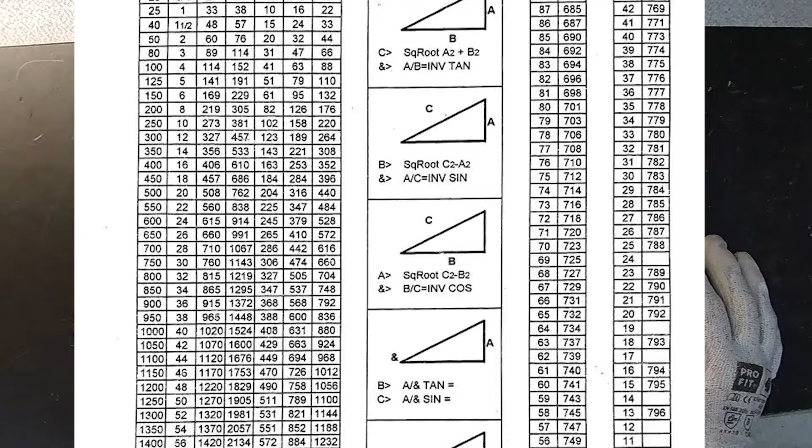Okay, let's get started. Before we start, we have to know some information. If you have measured or gotten some information about the pipe we're working with, there's a DN list that will appear now on screen. You can see the DN list, with all sizes in inches and DN. You can see the radius, and also the real pipe dimension in millimeters.

So I have decided on a DN80. I'm going to write it down, DN80. It's got a pipe dimension of 89 millimeters, it's a 3-inch pipe, and it's got a radius of 114 millimeters. Okay, that's all the information we have.

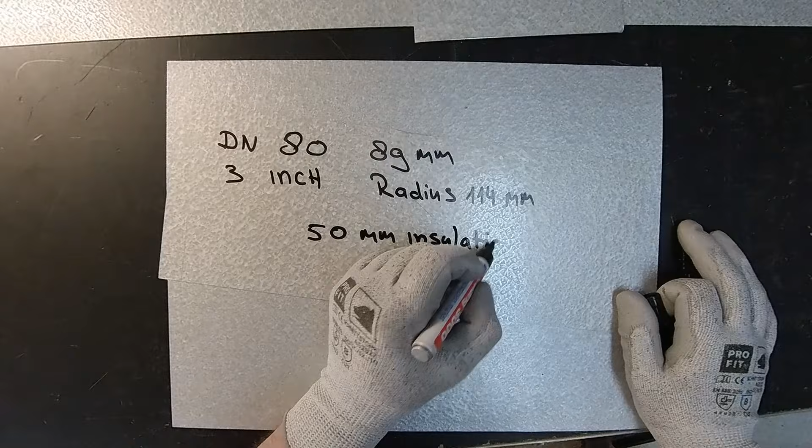The pipe I'm going to insulate has, well, something random - I'm just going to take 50 millimeter insulation. That means I'm going to round off some sizes. So if I have an 89 millimeter pipe, I'm going to round it off to 90 millimeter.

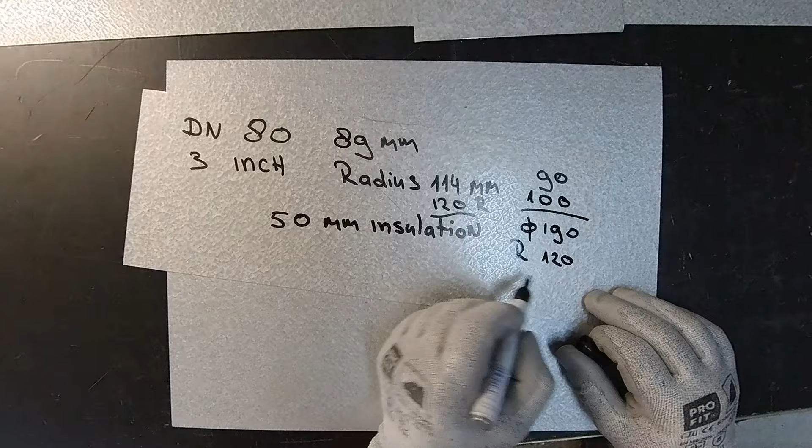And if my radius is 114, I'm going to round it off - my radius is going to be 120 radius. The pipe insulation is 50 millimeter, so that means plus 100. We have a diameter of 190 with a radius of 120, and it's going to be a 3-part bend. So that is the information I have.

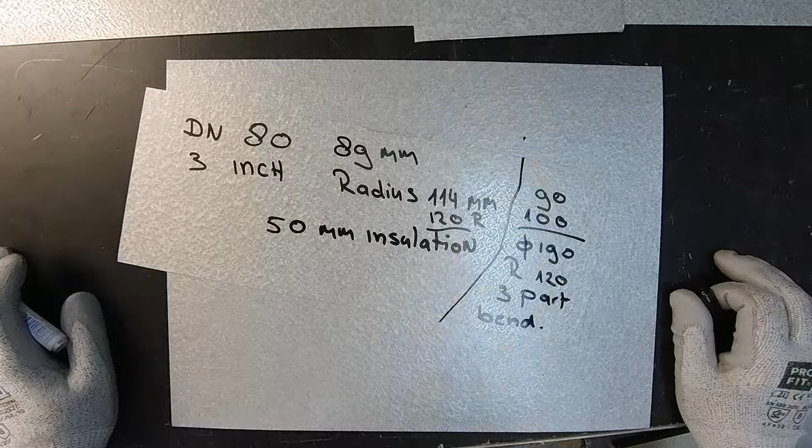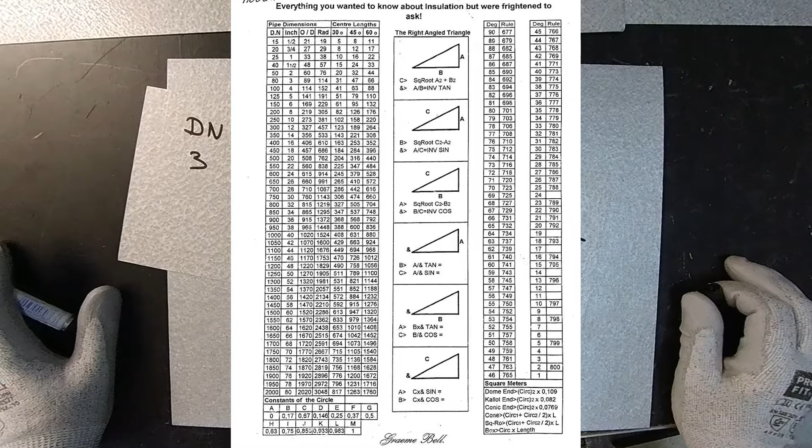I'm just going to show the list again on screen - you can make a screenshot of that list. If you don't have any idea how to get those radius or dimensions, it's a standard list. Of course there are also other pipes with other radius, but that's something you have to figure out yourself. Once you have learned how to make a segment bend, it's also easier to take sizes and find out the radius you need.

Okay, now let's get started. First what we do is make here a working line.

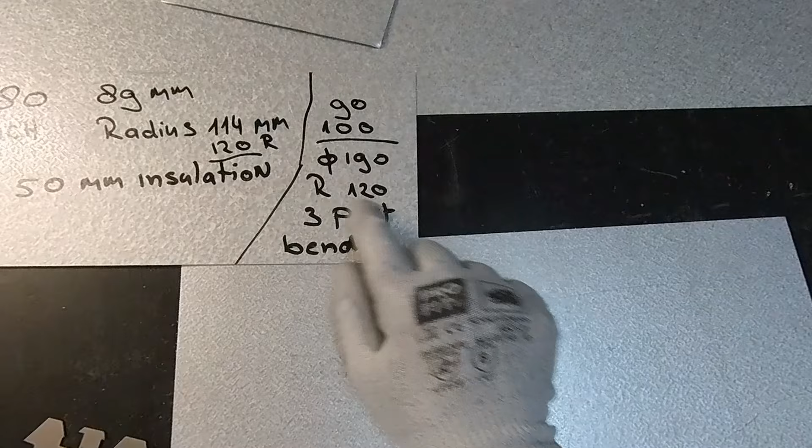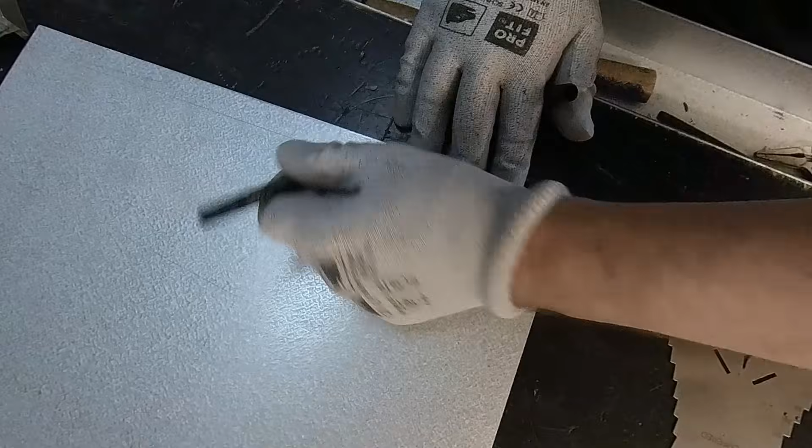So we said we have here 190 diameter, we have a radius of 120. That means we go from the side, from the 0 point here, 120 millimeter. And diameter 190, that means 95 is half.

So now we're going to make here a half circle. Let me check it here. So we have here exactly 190 diameter.

Now we're going to pull up here in the middle line. We're going to divide this part in two. And now you're going to divide this part in 3 equal parts, or in six equal parts.

1, 2, 3, 5, 6 - so we have here 1, 2, 3, 4, 5, 6 parts divided with a bow divider.

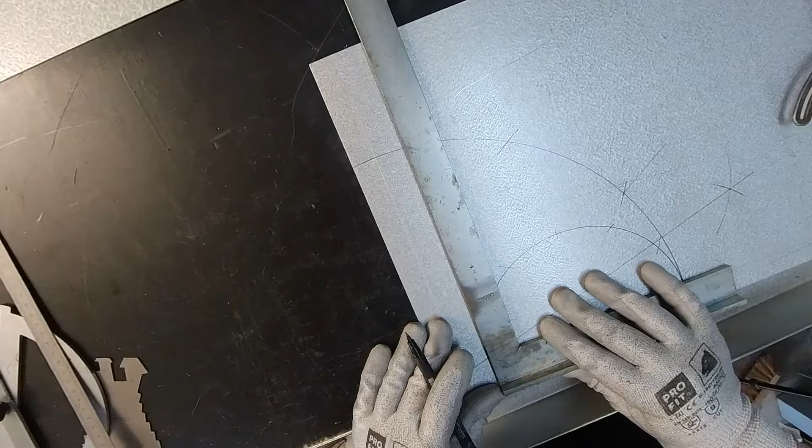So now we have the exact angle we need for our model, the template we make, yeah. So next thing what we're going to do is we're gonna pull up those lines. So this one, going to pull up, and the next one.

So these are now my points. So I'm gonna number it. Number 1, number 2, number 3, number 4, 5, 6, and number 7. So these are my points here.

Now, what we also are going to give here, this distance is here 20 millimeter, and I'm going to give swage allowance 5 millimeter. That means I give here 15.

And now I have here down on the line, so these are exactly my points, including the swage allowance. The swage allowance doesn't affect the angle. So if you forget the swage allowance to give, or you give a little bit less or more, it won't affect the angle, it will just affect the radius. So the radius is getting a little bit smaller or a little bit bigger. That's everything. This is now done for now.

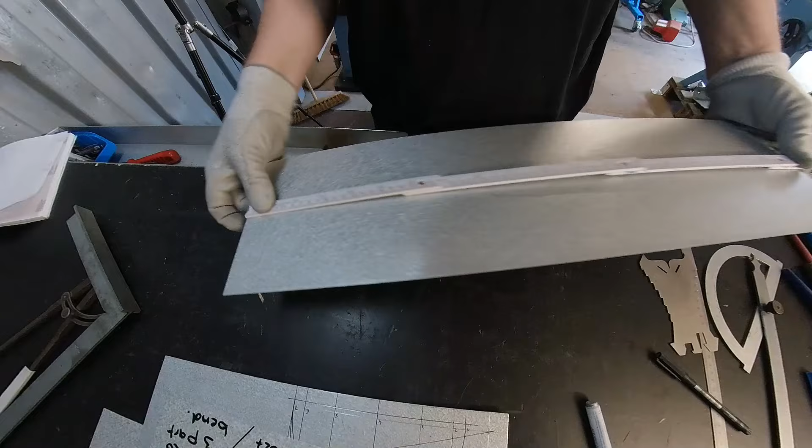So I'm going to check this here out. See, and put it here exactly on the metal where it is, and here you see we have here, wait. So we put here this exactly on the size, and here we come to 627 millimeter. See?

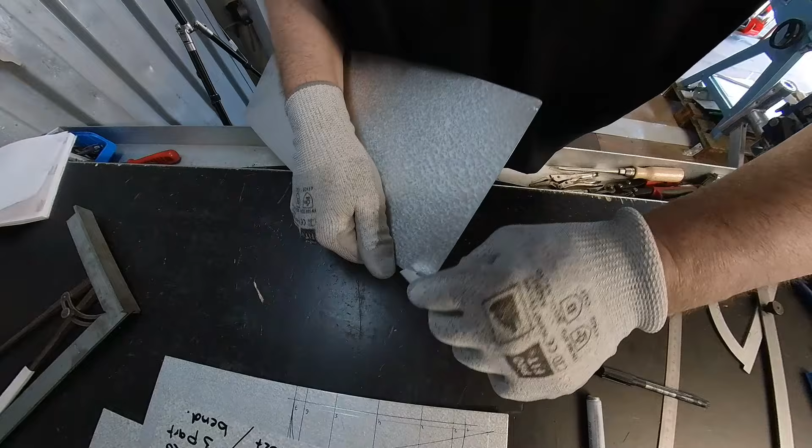Okay. Now what we do is we go left and right, 15 millimeter. And here also 15. And well, I have here, you see, so the outside, the biggest size from the outside is, well, it's almost 65. That means I need a maximum wide metal of 130, 140. So this is bigger. I have here 180.

Yeah, so you can always check here the biggest size, how big your metal should be. So 180 I have. So I'm gonna put in here the middle line. That's the middle line. Now, of course, I can make here this line a little bit more visible.

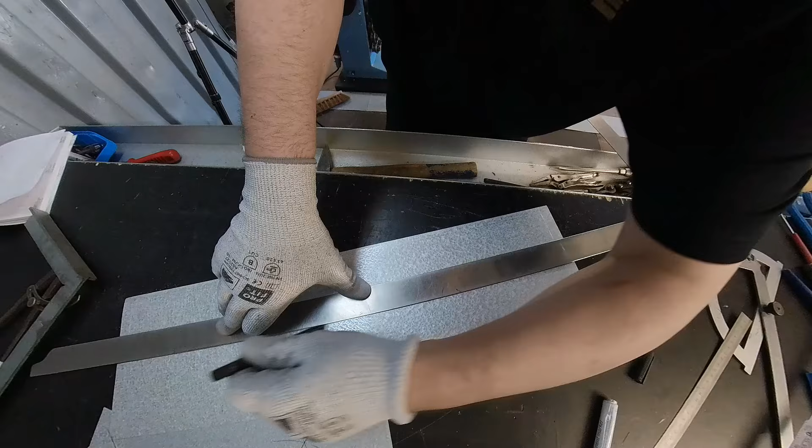And we're going to divide it in 12 equal parts. So I'm going to make this also a little bit more visible. Yeah, that's the thing. If you work with real sheet metal, it's always a little bit hard to make everything look visible because of the light and everything.

So now, as always, we're going to use this method to divide. So I'm just gonna hold my measure tool here, 650 I have here in diagonal, and a half of 650 is 325.

Wait a minute. But you can also put normal diagonals. Put just a diagonal, also a method here. If this smaller, see?

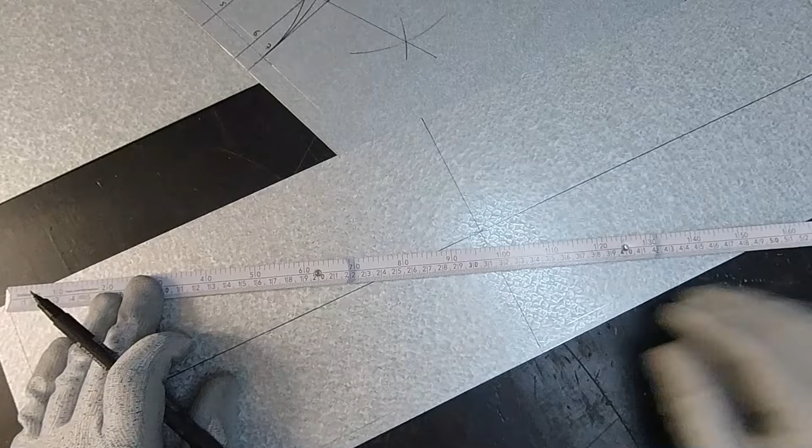Okay, now next thing is we're going to divide these parts exactly in 12 equal parts. So putting this here on the line, see here, the nil on the line, and I'm going to find something I can divide exactly in 6. So 6, 30 maybe, no 30, yeah, okay, 30, yeah, 300 millimeter. Exactly in 6 parts. So we have here.

5, 10, 15, 20, 25, and we do the same thing on the other side. And there's always a number you can divide in equal parts. 5, 10. So once we did that, again follow those lines.

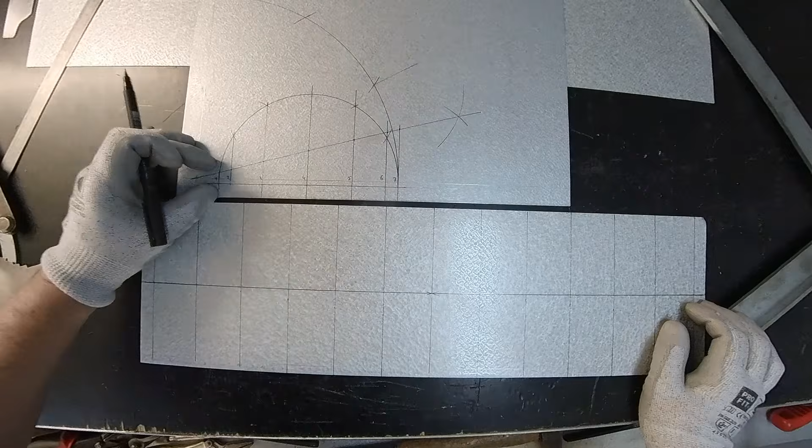Now once we have everything ready, the next thing is we're going to number it. So this is the bag, this is the biggest size, and that's the smaller size. When you look here at the bend, we have the bigger size and the smaller size, and exactly in the middle where the seam is, that is number 4.

So we start with the seam, number 4, and then we go backwards, number 3, 2, 1, and then number 2, 3, and you see number 4 is in the middle, and then we go number 5, number 6, number 7, that's the biggest one, and then we go back number 6, 5, and number 4.

So now what's left is to drag over those points. Number 1, here's number 1. Number 2. No, number 3. Number 4. Number 5. Six. And the last one, number 7.

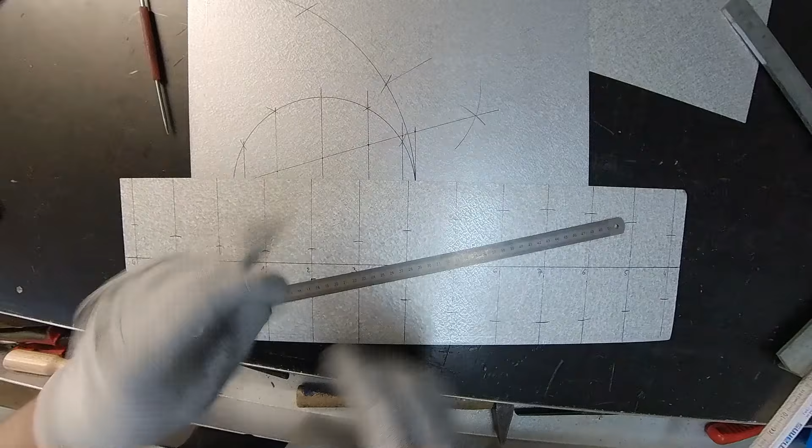So now what we're going to do is just connect those lines. Number 3, 4 and 5 should always be in one straight line. Then we go from number 5, 4 and 3, also a straight line.

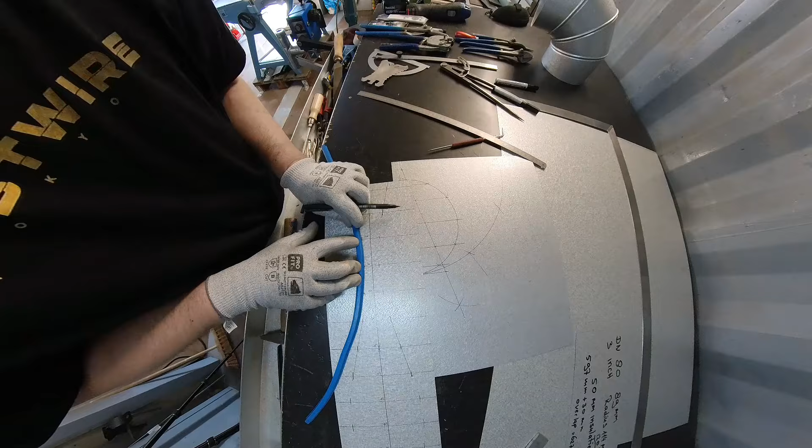Now we're going to make this rounding form. You can take a metal, put it in like this here, and then pull up the line. But I have also something like this, a rubber with something like a metal in it, good for things like this. So I'm just going to put it here on number 1, number 2, and number 3.

I'm just going to hit it once. Okay, now we have a straight line, and now number 3, 2... see? So now it's already in form.

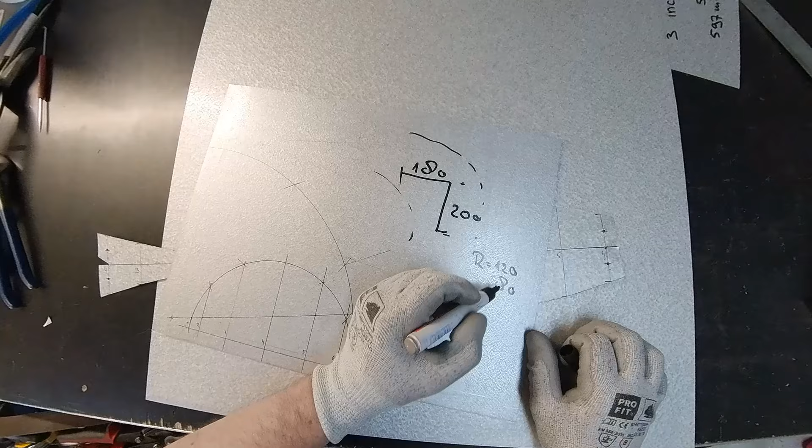This is my band, so normally it's round, but this is my band, and I want to have a size here of say 200, and here a size of 180. That means if the radius is 120, then 200 minus 120 is 80, so that means I give radius plus 80. Same thing here, I have 180 minus 120, so 60 is over, that means the end segment is radius plus 60.

That is what we're going to do. So radius 120, starting segment is 200, so we're going to do plus 80. That means 80 millimeters.

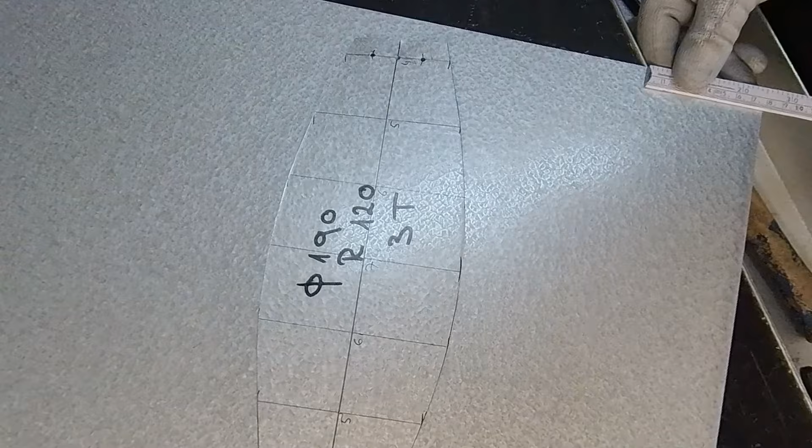And if you give a swage, so if this segment is connecting another pipe, of course you have to give also a little bit, 5 millimeters swage allowance you have to give. But I'm not gonna give here any swages. So, and now here, that is why we have cut out here this middle part line.

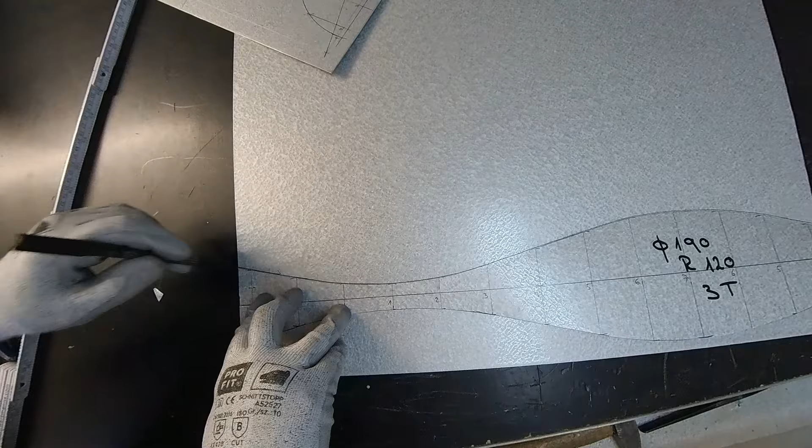We're going to put exactly here this on the middle line. Same thing on the other side also. So now we have it exactly in the position, and now I'm just gonna draw here my segment. I'm going here just to drag over those holes.

And now you just put it here on this line, and if you have cut it out good, see, it's almost equal. Drag over the holes.

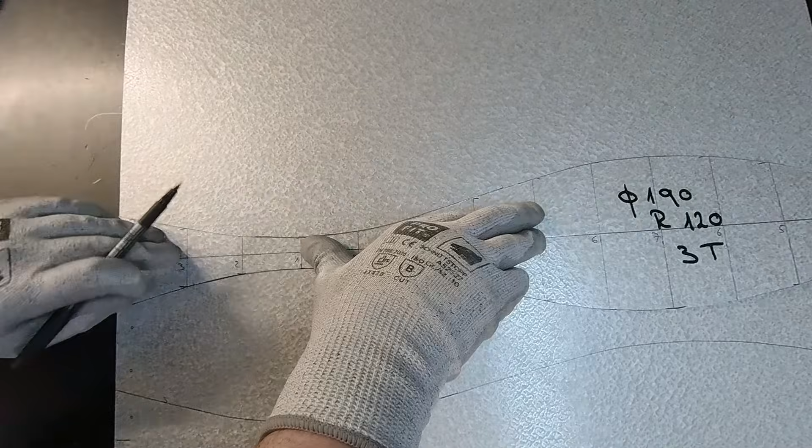And the last one. Now the last one is just put it on the line here, and we're going to only mark the holes. And here, this line, we're just going to make here a marking. Same thing on the other side here also. Just make the hole and we mark it. So that is the starting segment, and that's the end segment.

We said end segment is plus 60, so I'm going to give here 60 millimeter plus, and here also on the other side also plus 60. And now you can connect this one. We don't have to, but should be, just for the picture. So this is now my band. Don't forget the holes.

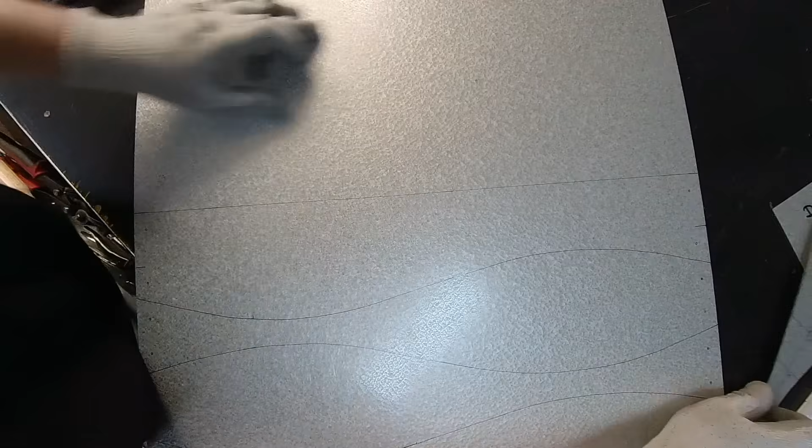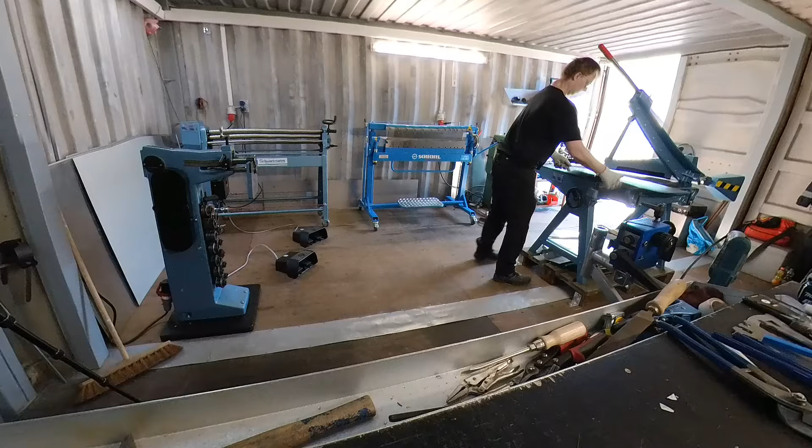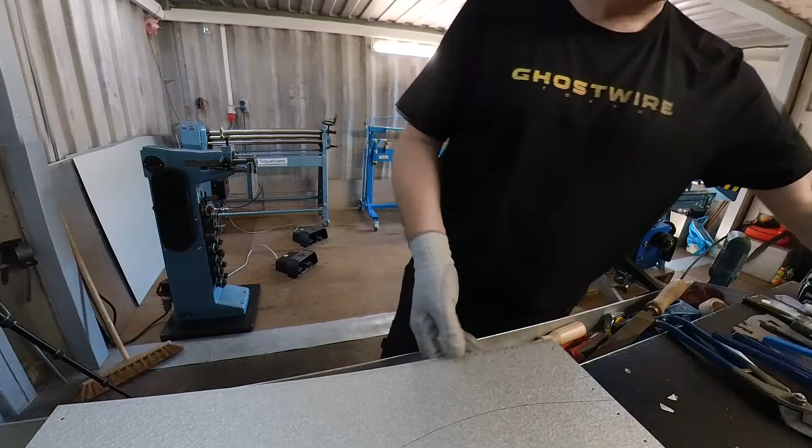So now, almost done. Gonna punch out now the holes in it. Now, next thing is I'm gonna cut this here out on the guillotine. And now, of course, I'm going to use here the electric shears to cut out.

Okay, well, because it's a standing band, so the band goes from left to the right, means this is here the starting segment, the one with 200. So normally I say here comes a swage. The X is for a female swage, and I said here, okay, 200 length. Then the middle part comes also with a female swage, a male swage. These signs we use here in Germany, but you can also find them on a PlayStation controller.

Okay, now here we have a swage, female swage, male swage, and now the end part comes also male swage, and we said the end part should be 180. So if you have more bands to do in some kind of a serial, I think it's always good to write down exactly the sizes. Now, next thing is what we need to do is we're gonna swage it, round it, and put this thing together.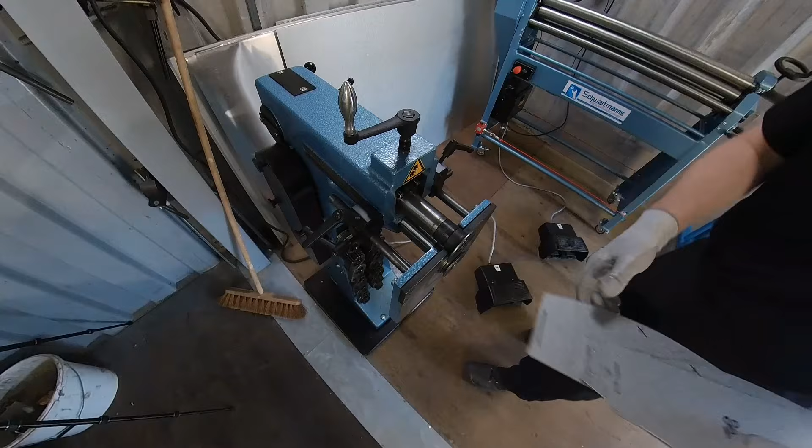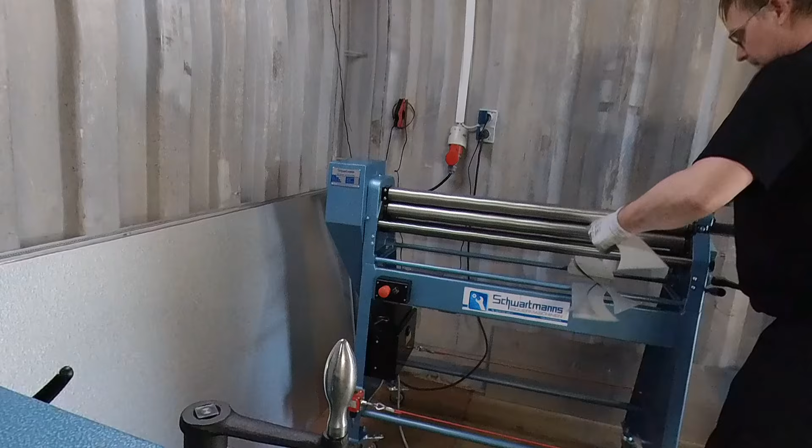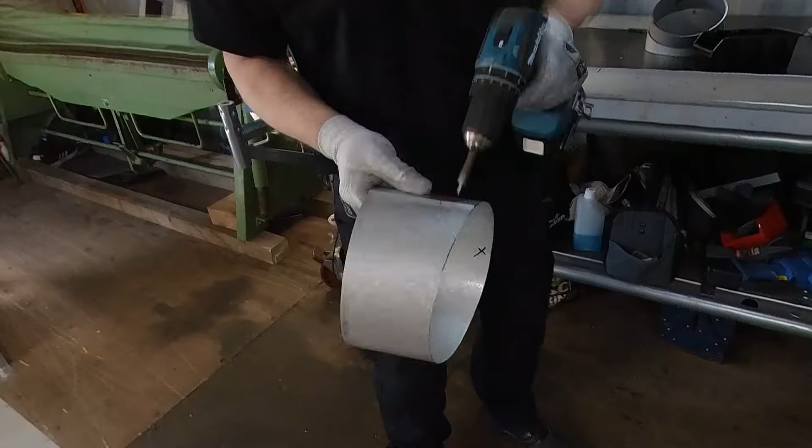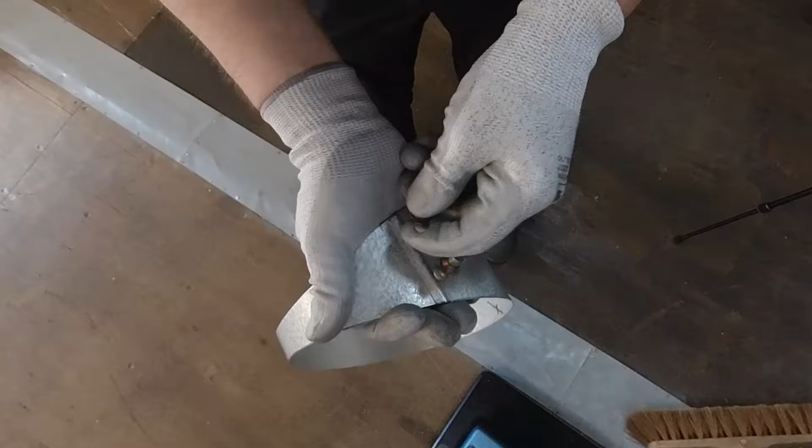So I have here swage wheels number 1. I can also use smaller or maybe a little bit bigger, but the number 1 for diameter 190, I think it's a good size. So now we're going to round it. Here. Here one. Here are these things. See? Just put them here in, and you don't need screws. It's really quick.

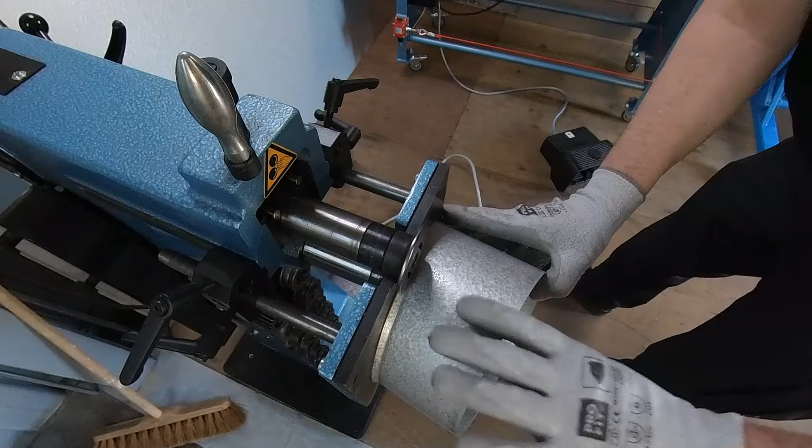Okay, for the starting segment, so the first time here goes against the plate, and now I'm gonna hold it straight here. So this is here in a straight line. See, I have here a lot of air under. So by the next round, I'm gonna push it down. That's the female swage, and here also again doing the same thing.

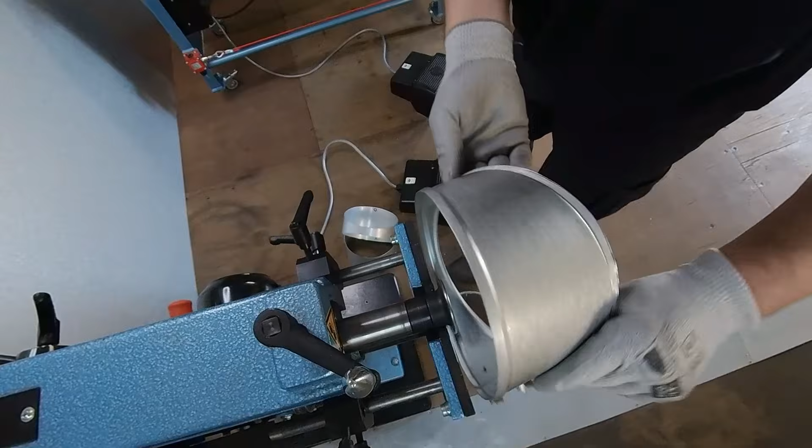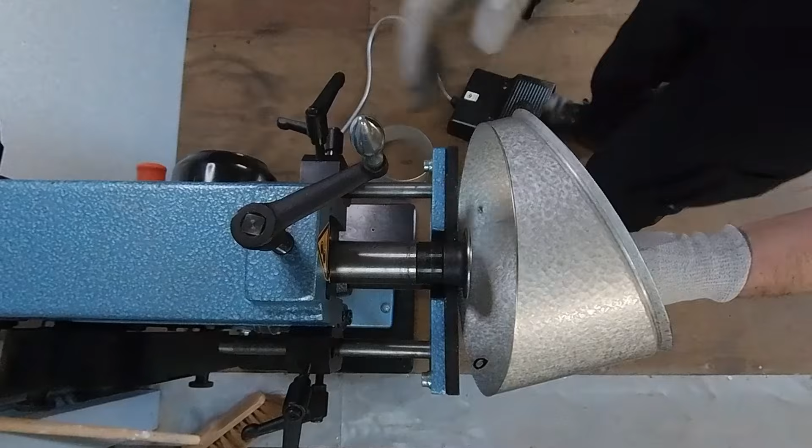Male swage. So I'm gonna give the male swage a little bit more, only a little bit. And if you come by the seam, it's always good to pull it a little bit up, so that this one here really closes very good. And the last one gets only a male swage.

Okay, that was the swaging part. And now let's put this thing together. Now if you did it right, you should always see something like a half hole. We call it the half hole. Now, that's the one, the half hole.

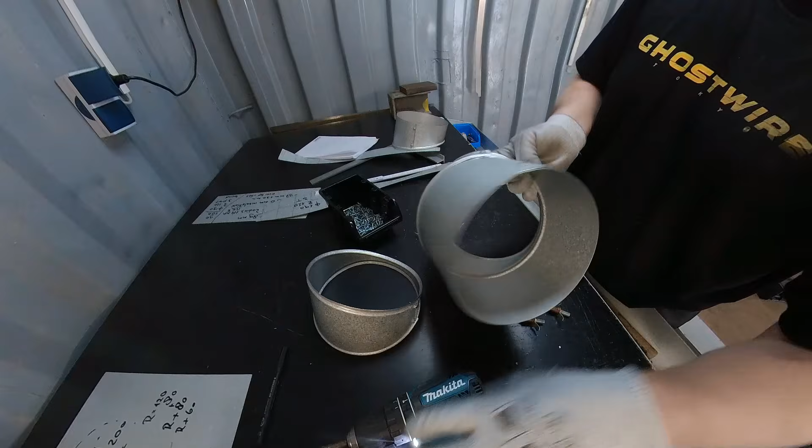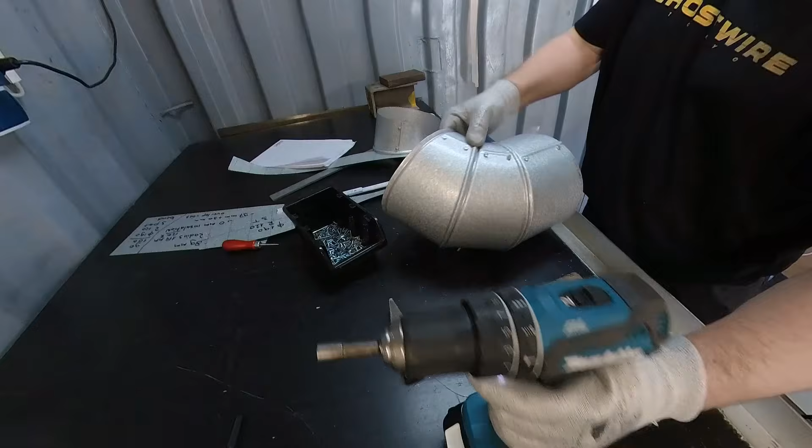Next one. Can catch the hole. Okay, now a little bit here. Because if you're going to fit the bend, it shouldn't fall out. It must be really good. And the last one.

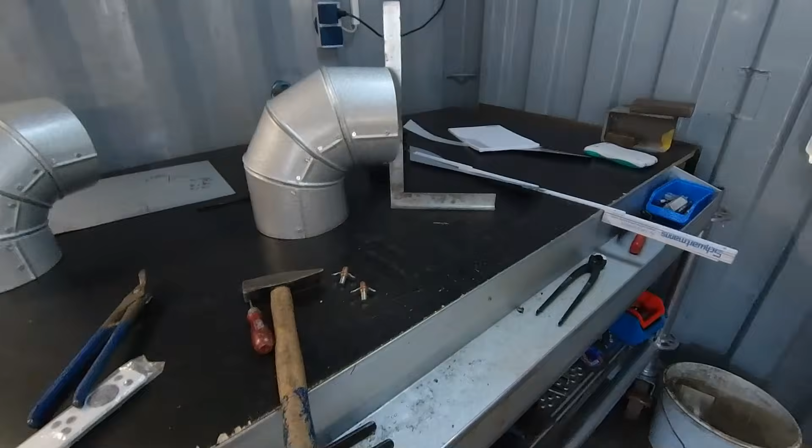Okay, well, that's the bend. And now the biggest question we're going to check out. Well, it is, as you can see, 90 degree, a little bit. Okay. 90 degree. I hope I have held the angle well. Sometimes you have a little bit of form, so it gets really well.

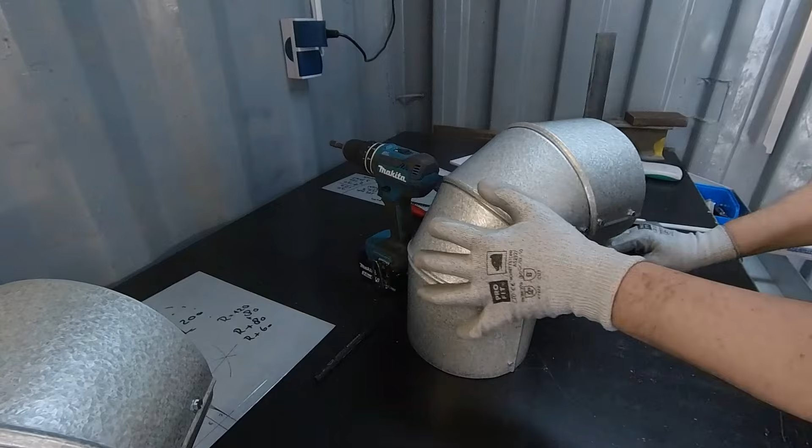Maybe from here, see it better. You can also look inside. Okay. Well, that was the 90 degree segment bend in this video. I hope you enjoyed watching and have learned something. I have tried to explain it as good as I can.